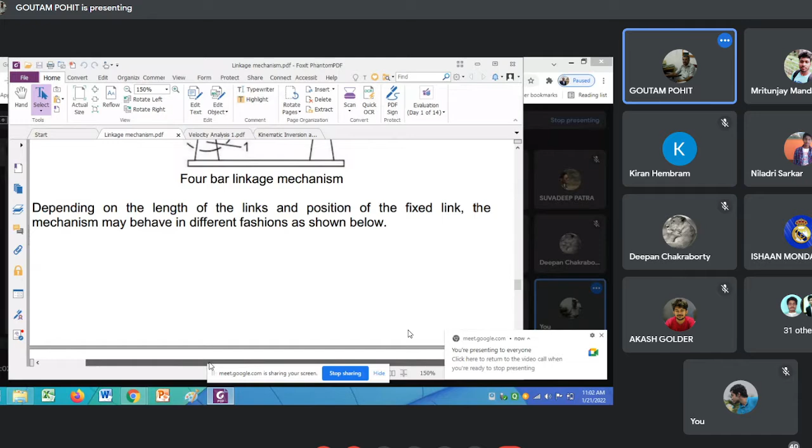Okay, let me start the class.

We left at this place in the last class, right? This is a four-bar linkage mechanism, and these are the four members: two, three, four, and one was the fixed member, which is fixed to the ground. They are connected with the help of pin joint or hinge joint.

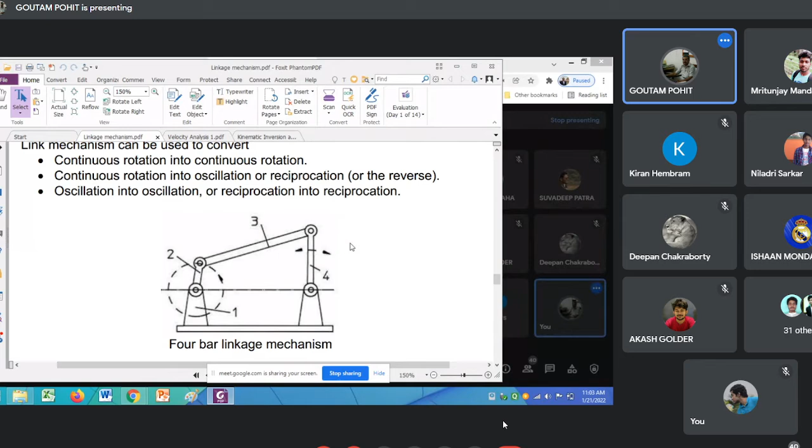For the time being, what we have done is we have fixed member one to the ground. If I start rotating link 2 as crank, then link 4 will also start rotating. Depending on the size of these links, whether it will completely rotate as a crank, or it will oscillate as a rocker, depends on the size of these four members, nothing else.

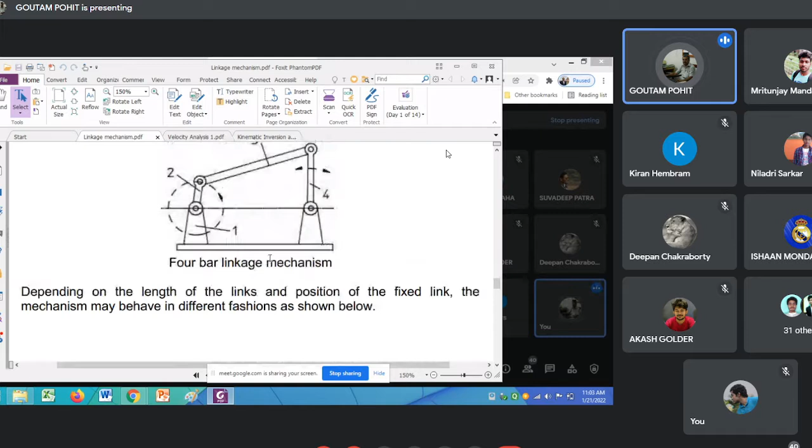We tried to find out geometrically if it is possible to find the extreme positions of the link, if we know the dimensions. We have explained these figures also: when it will be double crank, crank rocker, double rocker, and parallelogram linkage mechanism.

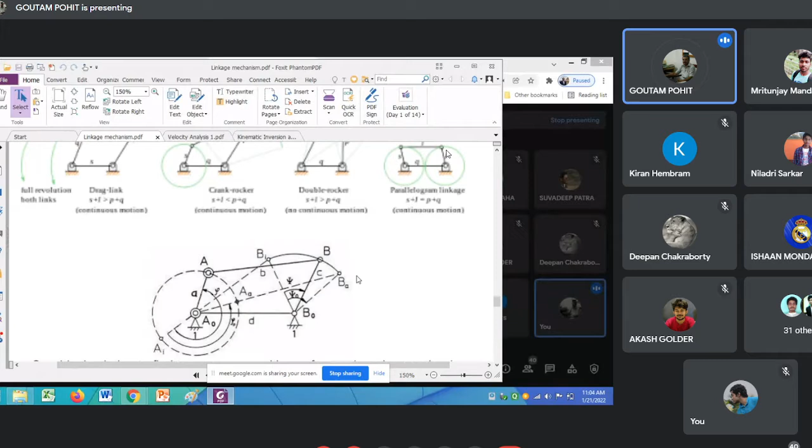Now, suppose this is a four-bar linkage mechanism, same mechanism, and there is a figure here which is a slight modification. What we have done is we have removed link three. Instead, we make a circular slot here, with the same radius as link 4, link 3, so that its center will be here. Within that slot, we place a sliding bar, this link 3, which can slide along this curve. The radius of the curve and the bar is framed such that it can easily move in this direction.

Sir, a few people are trying to join. Yeah, that's the problem.

Now, so what we have done is, since somebody has just joined: this is a four-bar linkage mechanism, we remove link 3. Instead, we make a curved circular slot, fixed to the ground, and the radius of the slot is such that it will have the same.

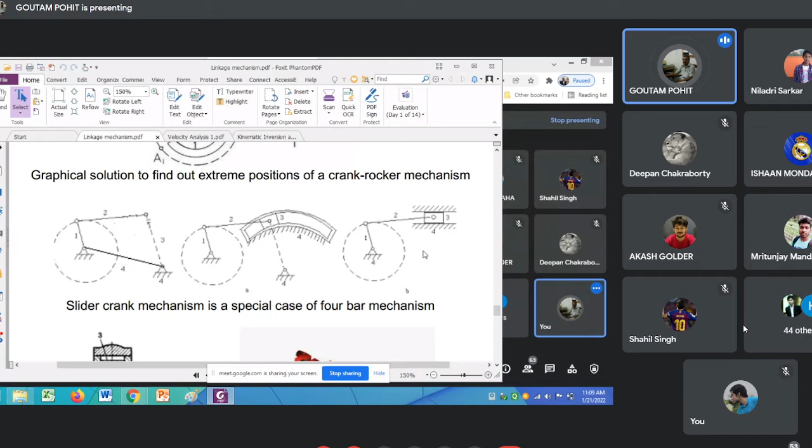The main advantage of this mechanism is that one link has a rotating motion and the other has a reciprocating motion, so we are converting rotating motion into reciprocating motion. The reverse is very useful if we see the engine of a car. This is an IC engine.

What? I couldn't get you.

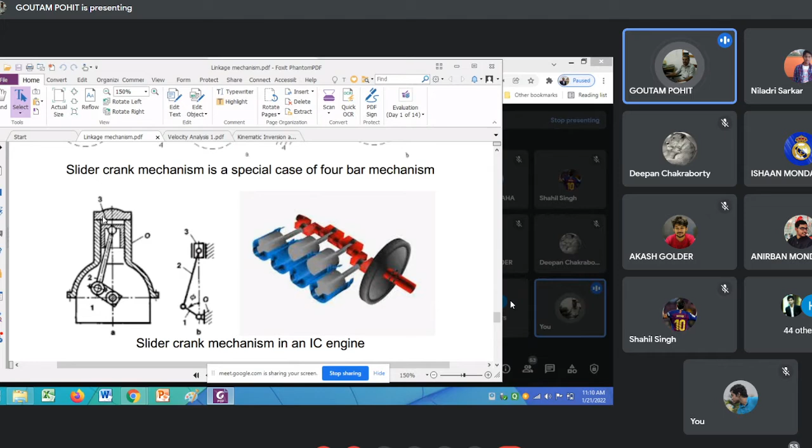Anyway, now this is the slider crank mechanism. This is the engine cylinder of a car. This is the space where the fuel, either diesel or petrol, enters through some valves. I can show you, this is an actual car engine. So there is some inlet valve, and there will be some exhaust valve.

This is the slider crank mechanism. This is the piston, this is the cylinder. Fuel will be burned in this region and this will produce enormous energy. By this energy, the piston will try to reciprocate in this direction, and as it reciprocates, this reciprocating motion is converted to a rotary motion with the help of a slider crank mechanism.

Now, for a car engine, this is called the crankshaft. We generally have at least three-cylinder or four-cylinder engines, and the positions of the crankshaft are made such that the firing takes place at different positions, so that it will be more or less uniform.

But still, there is a fluctuation of load. In order to remove that fluctuation, we use a flywheel. This is the flywheel. This is an essential part of any automobile engine. But our concern is this slider crank mechanism.

Now, as it moves in this direction, it will come to one extreme end, and as this point comes in this direction, it will reach another extreme end. So this internal length we call the stroke length of the slider.

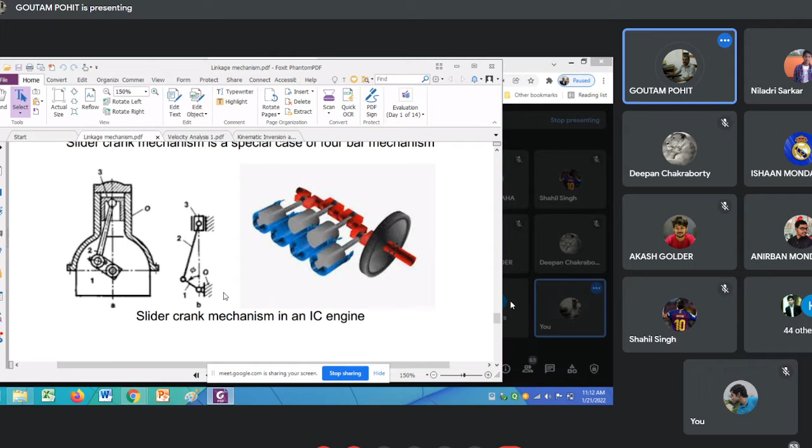And this is an actual engine. Generally, if it is a four-cylinder engine, we have four cylinders placed vertically, with inlet and exhaust valves. Inlet is for the injection of the fuel. Exhaust is for after the burning of the fuel, the entire gas comes out through this, ultimately to the exhaust. The intake positions, compression, expansion, and exhaust will be dealt with in your thermodynamics and engine classes in detail.

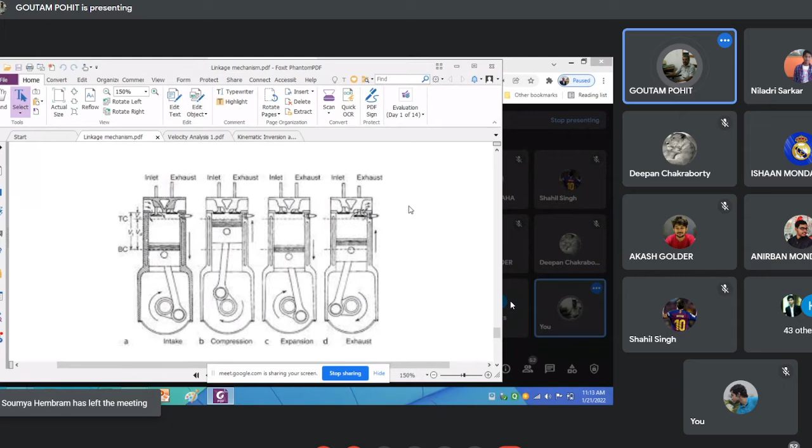Now there's another aspect, the transmission angle. For a kinematic chain, it is a kinematic quality which gives us an idea of how well the force is being transmitted. This is a driving crank, and this is a driven crank. Force will be transmitted perpendicular to this, because along the length we cannot transmit any force. So this angle, mu, is known as the transmission angle.

This mu, if it is 90 degrees, then it will transmit maximum power. But if it is at some other angle, there will be a problem with the transmission, because the force will be along the AB direction, and no force will be there to rotate the link. So this is the definition of the transmission angle.

Two extreme positions of the transmission angle are shown here, you can go through it and understand. These are shown in terms of the link lengths.

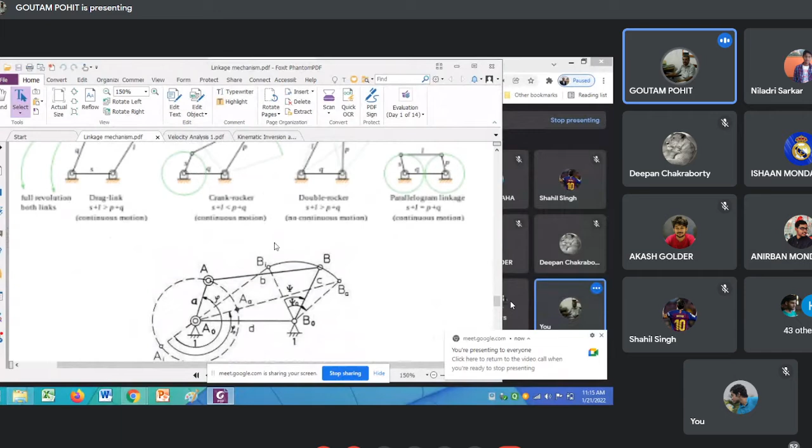Now, going back to where we were, we mentioned that we can geometrically find out whether a four-bar linkage mechanism is a double crank, crank rocker, or anything else. But sometimes it's difficult to do all the geometrical calculation.

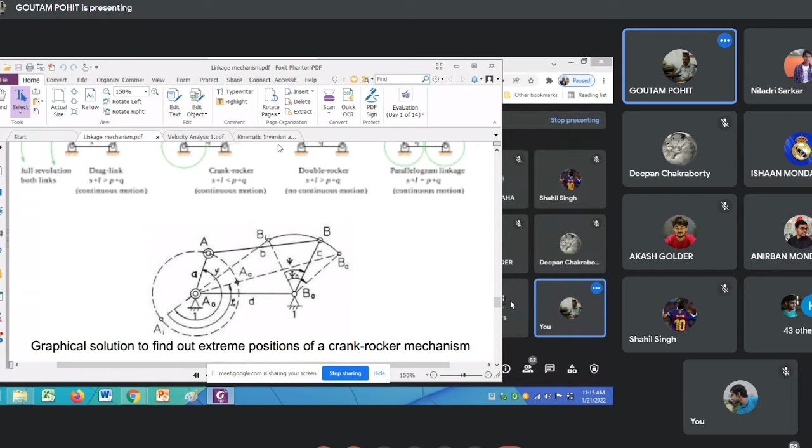There are some criteria by which we can say beforehand how a link, a chain, will behave. Another important thing is that in this particular four-bar linkage mechanism, we have fixed this member. If I fix other members, the behavior of this four-bar linkage mechanism might change completely. Though it is a very simple mechanism, it has so many varied qualities.

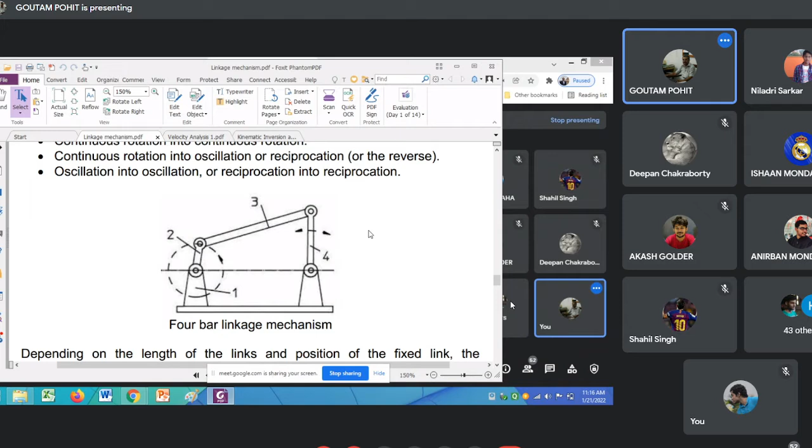So fixing different members one at a time and generating different mechanisms, we call this a kinematic inversion. So my next topic will be on kinematic inversion, kinematic inversions and Grashof's criteria.

It is observed that by fixing the links of a closed chain, a four-bar linkage mechanism, one at a time, we can get as many different mechanisms as the number of links in the chain. This process is known as kinematic inversion.

A particular four-bar mechanism would behave like a double crank, double rocker, or crank rocker depending on some relationship involving its link lengths and type of kinematic inversion. Grashof's criteria provide this information, given way back in, I think, the 19th century.

It states that the sum of the shortest and the longest link of a planar four-bar linkage... remember this is based on the planar four-bar linkage mechanism.

Seventeen minutes past, still people are coming.

It states that the sum of the shortest and the longest links of a planar four-bar linkage cannot be greater than the sum of the remaining two links if there is to be continuous relative rotation between two links.

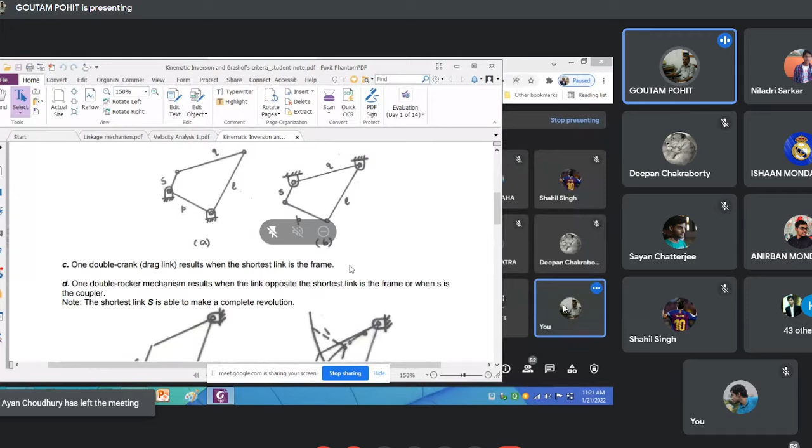If it is a double rocker, as per Grashof's criteria, it seems to violate the condition that if they are double rocker, then at one point this will stop. Another point when it comes to the extreme position, there will be a stoppage, a stationary point. So continuous motion is not possible then, but it will be.

Because what will happen, you can try it by the drawing, is that as it comes to the extreme positions, it will come back to the other end. What will happen is this small link will rotate completely, so it will have a continuous motion. This connecting rod or coupler will have a continuous motion, but still this will rock.

This will behave as a rocker, but this will completely rotate. So we have a continuous motion. So this is one condition.

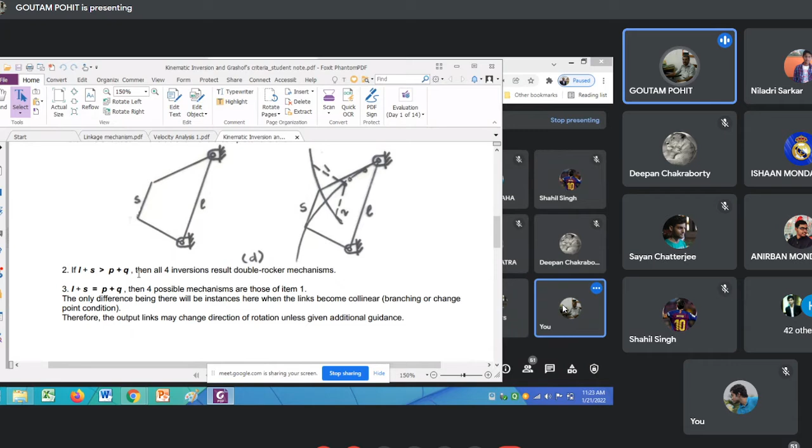L plus S is less than or equal to P plus Q. Second is when L plus S is greater than P plus Q. Then all four inversions result in a double rocker mechanism, because it's violating Grashof's criteria. As per the criteria, if it is less than or equal to, then only it will be continuous motion, so naturally it will be a double rocker.

And when L plus S is equal to P plus Q, then four possible mechanisms result, as in item 1. So again, four possible conditions could occur when L plus S equal to P plus Q. The only difference is there will be instances when links become collinear, meaning there could be a condition when they are in the same straight line. Then what will happen? It will behave as per Grashof's criteria depending on whether I'm allowing it to move as required.

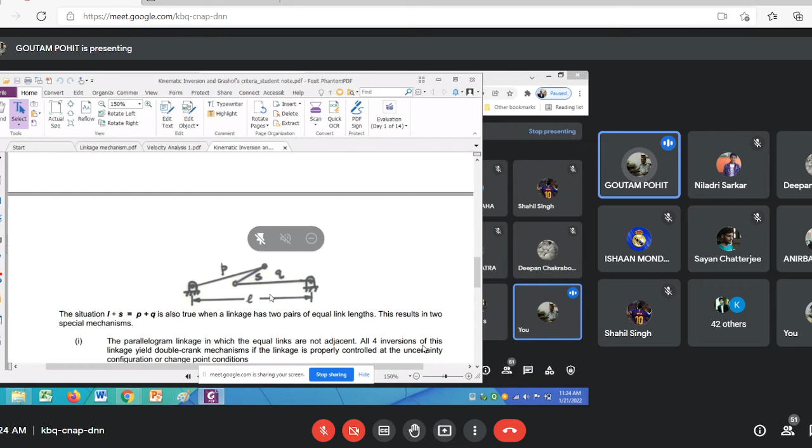For example, suppose it will be a double rocker in one case. Now I put a prop here so that after coming here, it cannot move in this direction. Then what will happen? This will rotate completely, but when it comes back, it will behave as a rocker. But that is if I give some constraint there. Otherwise it will behave as the condition of one.

Now, the parallelogram linkage is one in which the equal links are not adjacent. This results in a parallelogram linkage. All four inversions of this linkage yield a double crank mechanism, if the linkage is properly controlled at the uncertainty configuration or change point condition, meaning in these collinear conditions.

And a deltoid linkage is one in which the equal links are adjacent. Now here you see that they are not adjacent, but if I put 2S and 2L like this, it will result in a deltoid linkage mechanism.

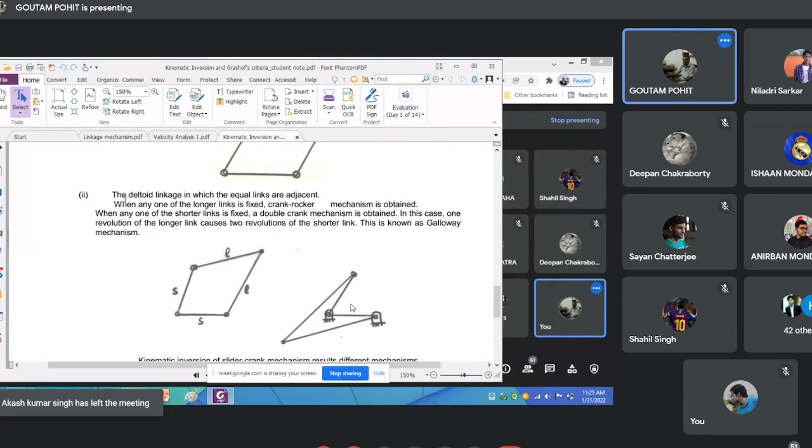Now when one of the longer links is fixed, if I fix down one of the longer links, it will result in a crank rocker mechanism being obtained. When any one of the shorter links is fixed, a double crank mechanism is obtained. If I fix this one, it will result in a double crank mechanism.

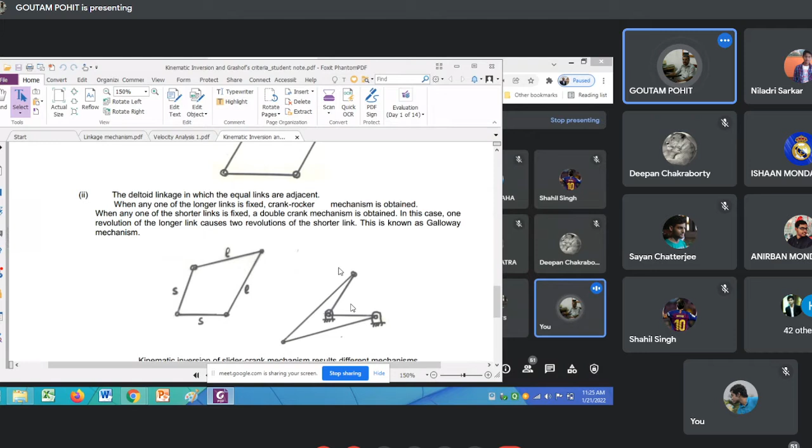In this case, one revolution of the longer link causes two revolutions of the shorter link. This is known as the Galloway mechanism.

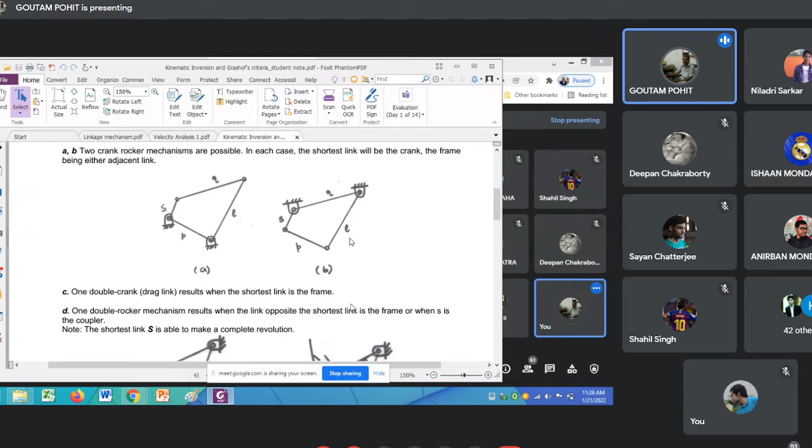So this is all about Grashof's criteria basically. Suppose the four link lengths are given to you, and it is mentioned that one of them is fixed. Then, considering Grashof's criteria, you can easily tell whether it will behave like a double crank, crank rocker, or double rocker. You only have to remember these conditions.

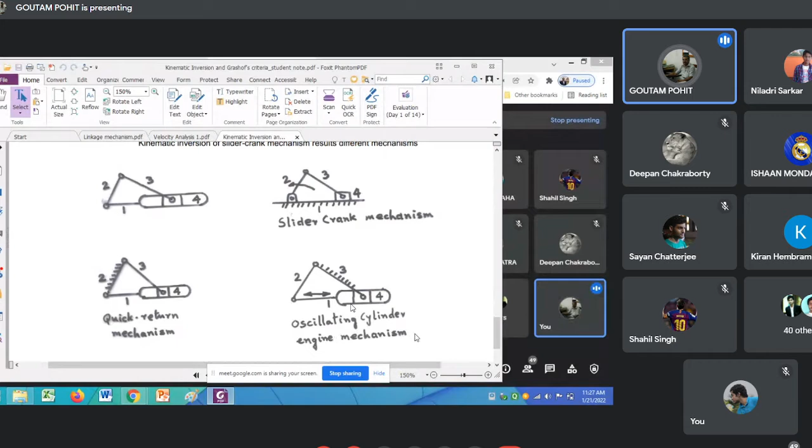We'll get a quick return mechanism. That has been used in a shaper machine. We'll talk about the quick return mechanism later on. And if I fix number three, we'll get an oscillating cylinder engine mechanism. This is generally used in radial engines.

So you find that we can get three different kinematic inversions by fixing three different links of a slider crank mechanism. Any question?

So we have covered up till kinematic inversion. Next, I will start the analysis part a little bit.

What, if I consider... say it again.

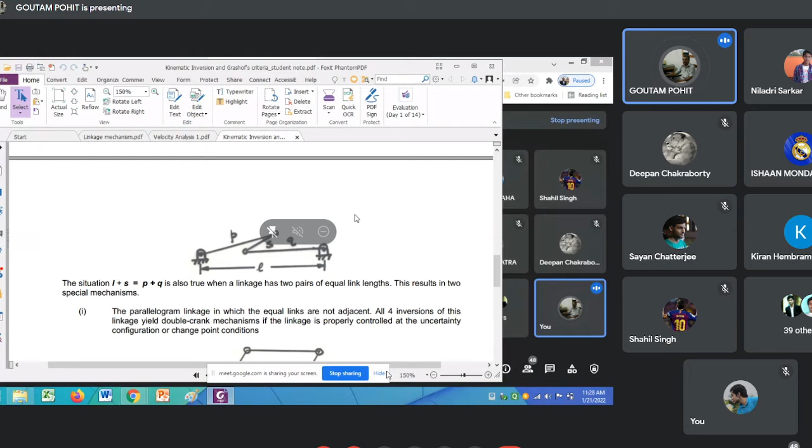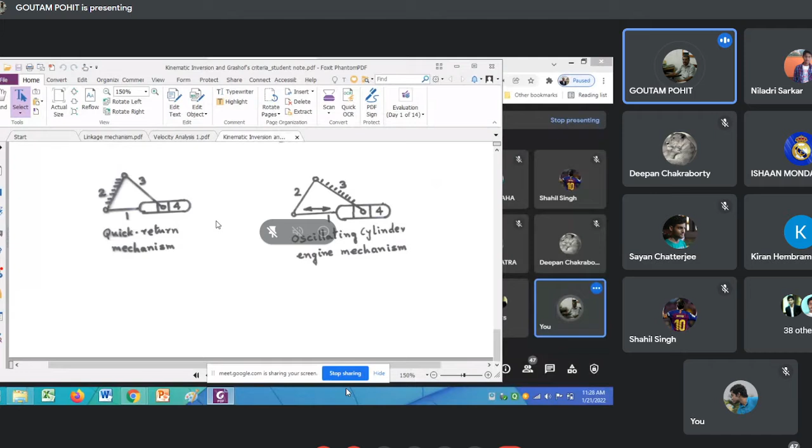For example, a quick return mechanism. See here, this slider is moving as this is happening. So it will give a complication, and it's a very effective mechanism we can result.

But let us first try with the four-bar linkage mechanism, its velocity and acceleration analysis. Then we'll come slowly to the complicated mechanism.

Redundancy means... no, for a four-bar linkage mechanism, we cannot have any structure as such. There will always be a motion. But if it is a three-bar mechanism, then it will be a structure.

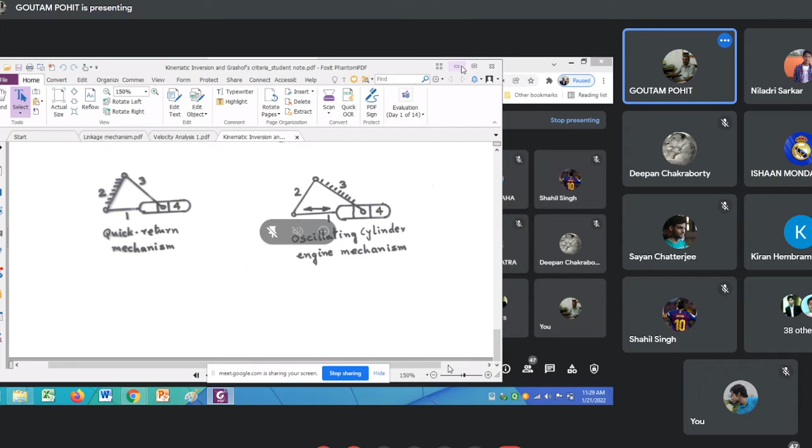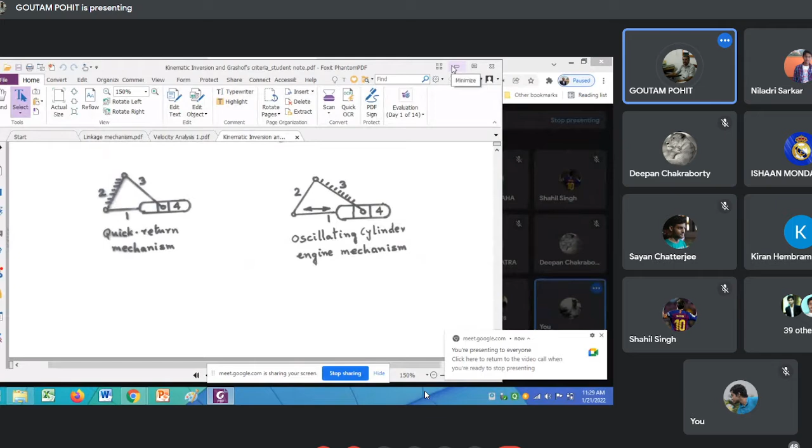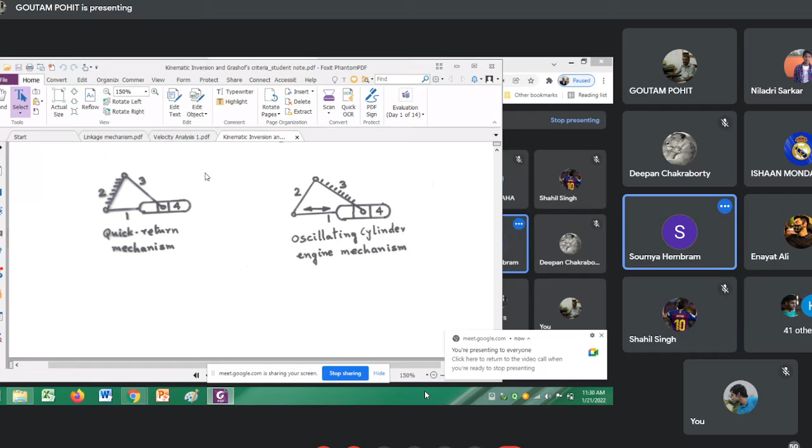Who's coming? Who has joined last? Just now, who has joined? So I have. What happened to you? What is the time now? 11:30. Actually I'm not so well, sir, so I was unable to join at 11. Sir, I also joined right now. I joined at 11 o'clock, left at 11:28, and just joined now. Okay.

So we'll start with the velocity analysis.

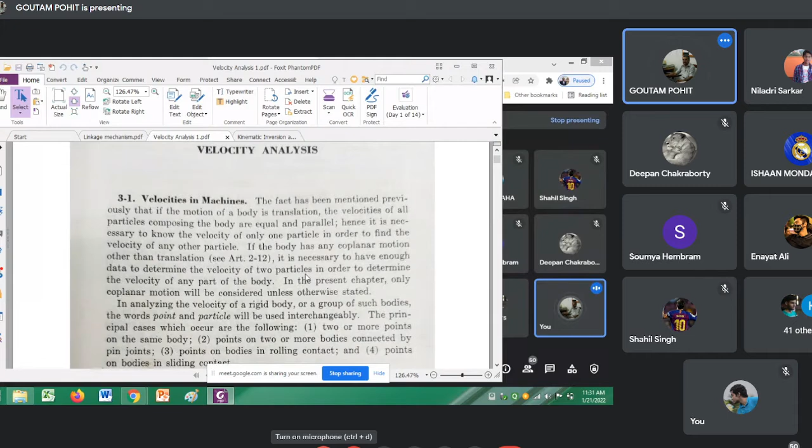There are some problems and other things. These pages, whatever I'll be sending you, this is chapter 3 of Doughtie and James. Some of the pages I have just copied, and I'll be sending this handout to you. I'll be highlighting the major points, whatever is written here.

Now, since we are going to do the velocity and acceleration analysis, and the treatment will be done graphically only for the time being, we'll go for the analytical case also. A vector representing velocity will have a magnitude, direction, and sense.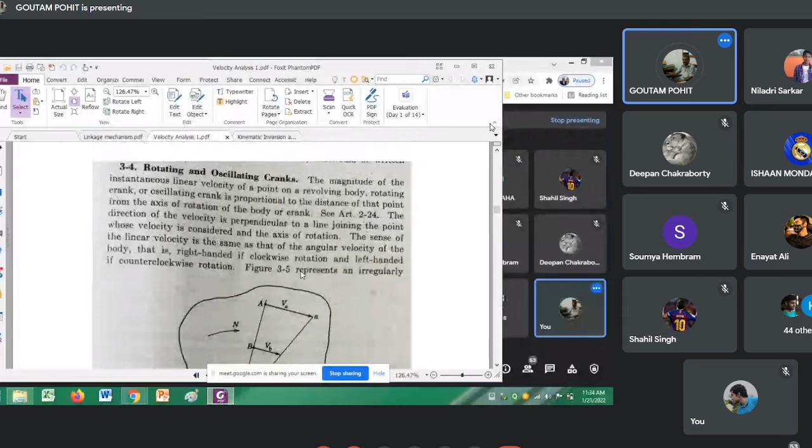Since we know the angular velocity of object M, and A is a point lying on this object, what will be the velocity of point A? VA will be equal to omega into QA. And what will be its direction? The direction will be perpendicular to the line QA. This is the velocity in magnitude and direction of point A, right? No confusion?

No sir, okay. This is the vector by which I am representing the velocity. What will be the velocity of point B? Omega into QB, sir. Okay, and if I draw with the scale, VB will be the velocity.

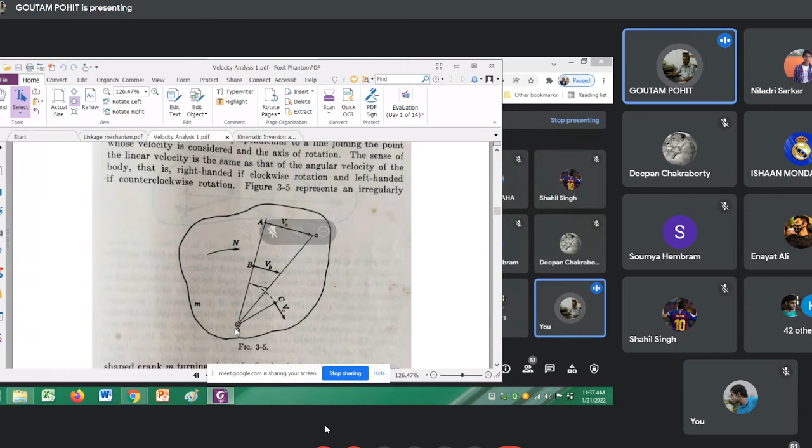It's okay, right? Because this is a similar triangle. The velocity of point A and velocity of point B will be proportional to their distance from point Q. So naturally, QB by QA will be equal to VB by VA. So we are using this similar triangle proposition to find out the velocity of point B.

This is the way we will proceed during our graphical calculations. What will be the velocity of point C? It will again be QC into omega. That will give VC.

Instead of doing that calculation, we take an arc QC, bring it here, and draw a parallel line here. So this length will give the velocity of point C in magnitude. Its direction will be perpendicular to this line.

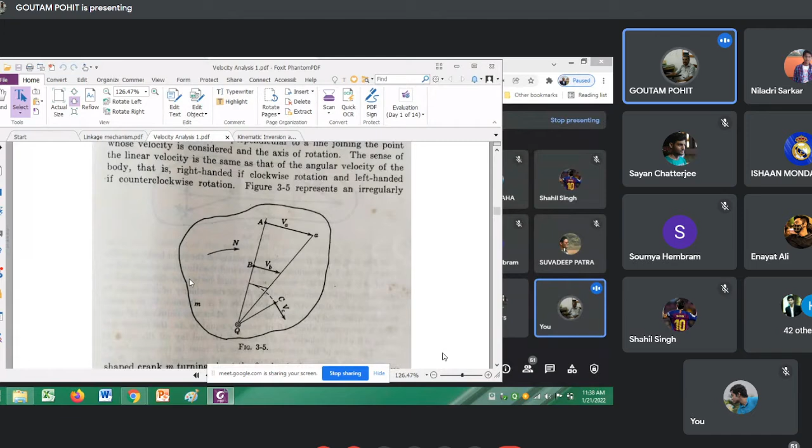That means if I know the velocity at any point of a particular object, and if we know that object is rotating about some point, then we can find out the velocity at any other points, both direction and magnitude.

I repeat this one. Velocity of point C we want to find out. What we do is take an arc QC, draw this line. From here, draw a line parallel to this to cut this line at this point. So this is the magnitude of the velocity of C, because this is proportional to their distances from the center Q. But actual velocity direction and sense will be here.

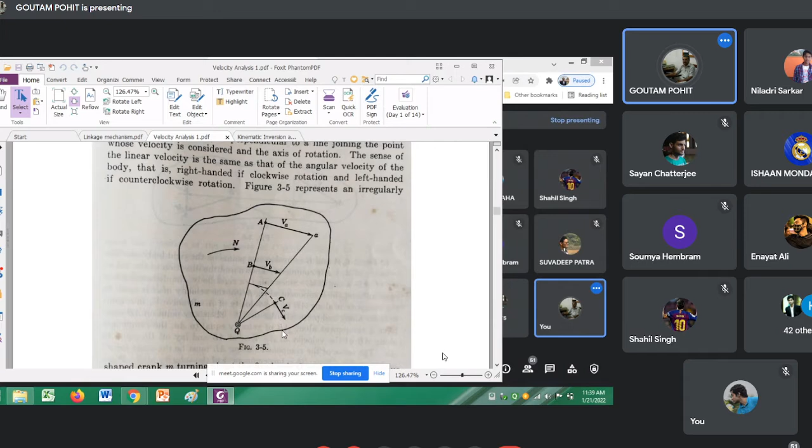You have to bring it here.

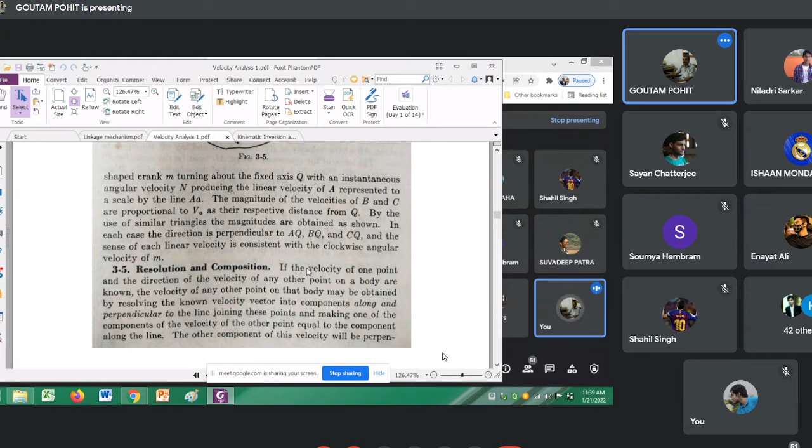Now, velocity and acceleration analysis can be done in four methods: resolution composition method, instantaneous center method, centro method, and relative velocity method. Relative velocity method is very good for calculating the velocities and accelerations at any other point, if I know the velocity of a point on a linkage mechanism. But we'll start with the resolution and composition method.

Suppose let us come back to this four-bar linkage mechanism. This is a four-bar linkage mechanism, right? Now you will find that this link, this is a crank, this is rotating. And if it rotates, this will also rotate.

Now, any point on this crank will have a velocity which will be rotary motion basically, any point. And since it is rotating, we can find out at any point the directions and magnitude of the linear speed, like if we know n into corresponding distances. This is also true for this one, because this is also rotating with a constant angular speed. Now, what will happen to this member?

What will happen is that this member will rotate and at the same time there will be a translatory motion. That means velocity at any point on this member, the linear velocity, will be perpendicular to this line. Similar will happen for this one, but this won't be true for this one, because this connecting rod is at the same time rotating and translating. So at different points it could have different velocity directions.

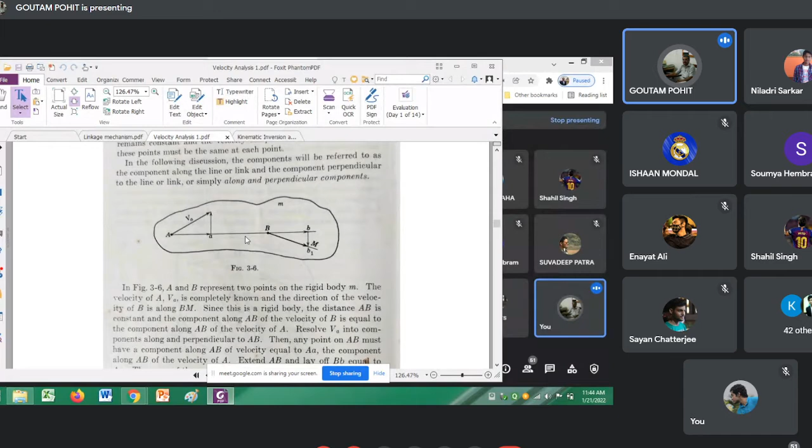Yes, sir. Because if it is not, then after some time the distance between A and B will change. As per the condition of the rigid body, that cannot happen. So the velocity component of B along AB will be equal to BB.

That we know. And another condition has been given: the direction of the velocity is known. This is the direction of the absolute velocity. So we can find out, we raise the perpendicular from this one to cut it here, and this will give the velocity of the point B.

So that means you find the velocity here is along this direction, its magnitude is A, and velocity of the point B is along this direction, its magnitude is BB1. And it's most likely that VA and VB are not equal in magnitude or direction, so it's completely different. That means this member is actually rotating at the same time it is sliding.

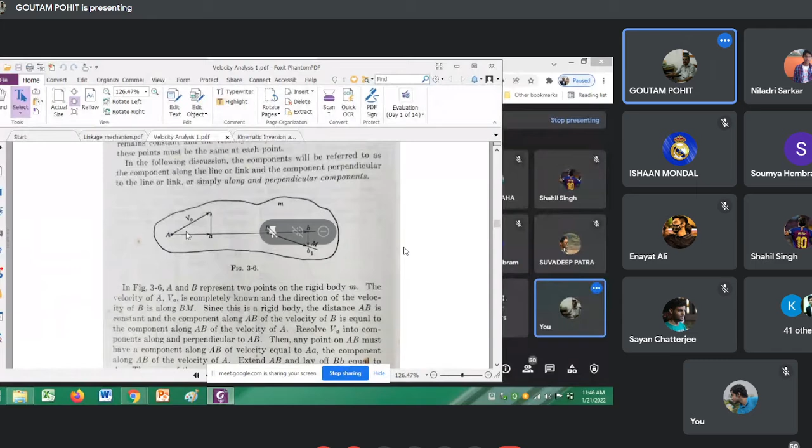If it would have only had sliding velocity, then all the points along any line would have the same direction and magnitude. It will be parallel if only sliding motion was possible, but it is not. Now let us take another point, C.

Where A, B, C, three points we have considered on the body M. Now for point C, neither velocity nor direction is known. But we know the direction of the velocity of B, and we know completely the velocity of VA - point A's velocity we know completely. So how to proceed? Again, we join A and B.

And extend this one, drop a perpendicular. So this is the component of VA along AB. Naturally, following the rigid body condition, this will be the component of the velocity of B along this direction, which will be equal to this distance. And if I know the absolute velocity direction is this direction, then we can find out this velocity - it is a perpendicular to find out this velocity.

So we know the velocity at point B and velocity at point A. We have to find out the velocity of point C. So again, we join AC and BC. Find out the velocity VA along this direction - this will be AA, and cut CC equal to AA. Similarly, velocity of B along BC will be equal to BB, cut CC1 equal to BB.

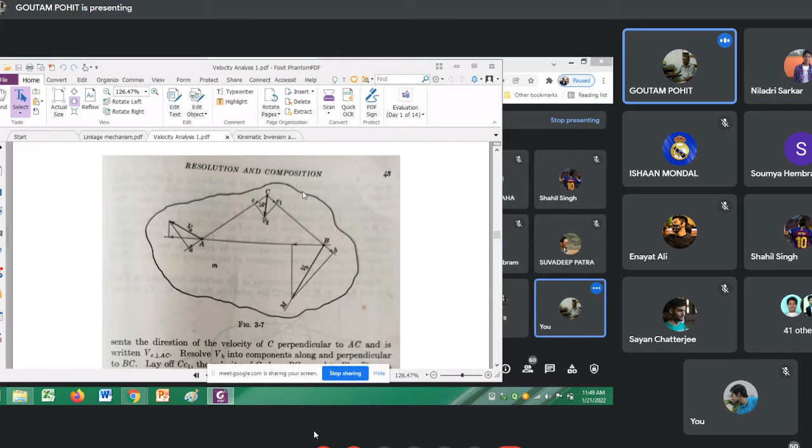Yes sir, there is another example being given where you go through it. The point A and B velocity directions are given, velocity magnitude is given, but AB is on the same straight line, and you have to find out the velocity of the point C.

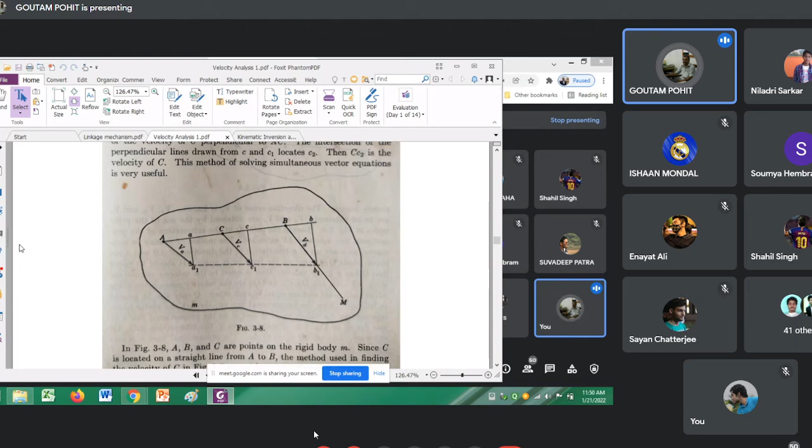Now what they have done is basically they assume that this link is rotating about some point. So this is the perpendicular component. Now if I meet these two perpendicular components along these directions, and join this and extend this to meet this one, as if this link is rotating about that point, then only that condition will happen, that this will give the velocity of point A and point B perpendicular component. So accordingly, if I know this, we can find out the component C. Once we know the component C, we can easily find out the velocity of the point C. It has been explained here in detail.

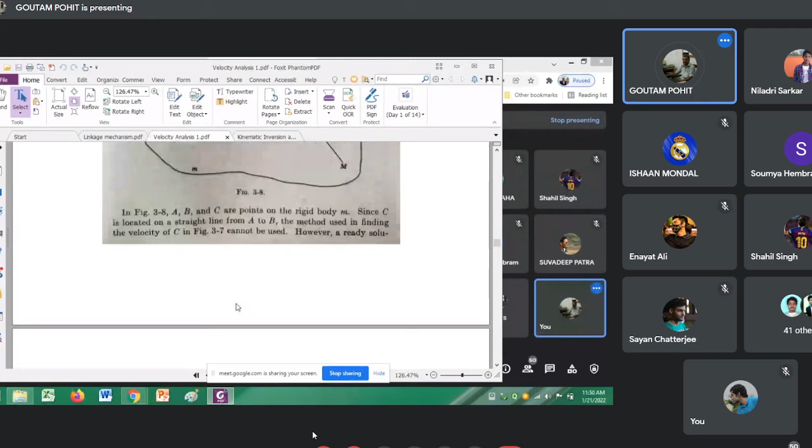Go through it. Now, the same relationship using resolution and composition method has been used to calculate the velocity of point B when we know the velocity of point A.

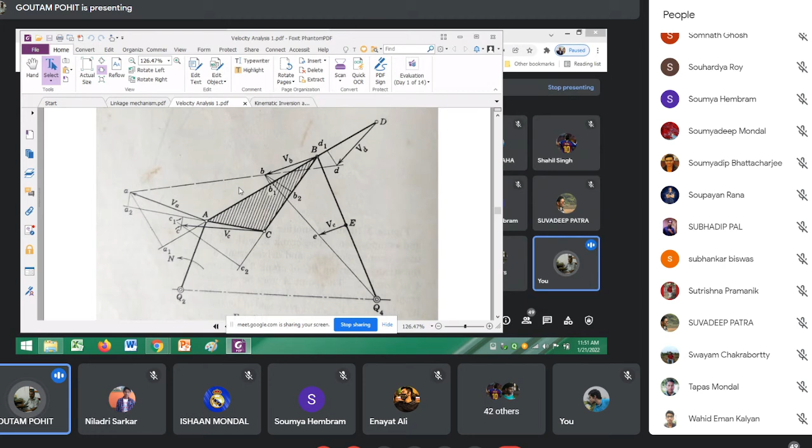Similarly, they have tried to find out the velocity of the point C also. Since VA is completely known, we can find out the velocity of B. Take a perpendicular direction, and this length will be equal to this one. What will be the velocity direction of B? Since this will also rotate about a fixed center, naturally the velocity of point B will be perpendicular to this one. So that direction is known. Once we know the direction, we raise a perpendicular to find out the velocity of the point B. Got it?

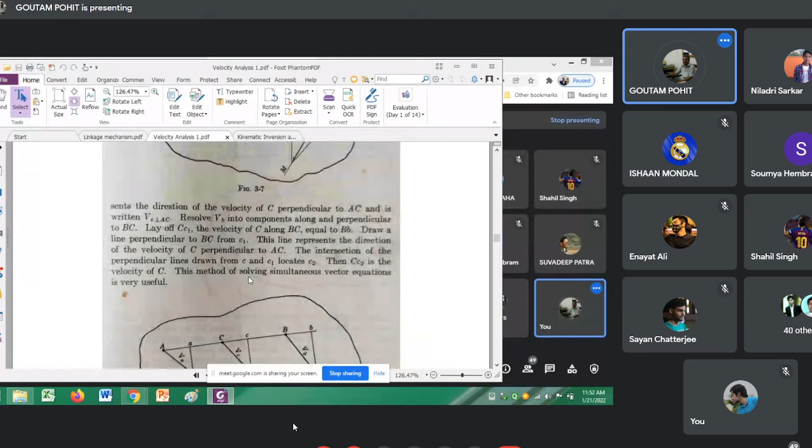Yes sir. Now, if we know the velocity of point B and velocity of point A, we can easily find out the velocity of point C, just like here. That is being explained here.

So go through it. Suppose I want to find out the velocity of the point E. How to find out? You join the tip of the velocity to here and draw a line parallel to this one. That will give the velocity of point E. Similarly, if I want to find out velocity at any extended point, we can find out easily. Same procedure you have to follow.

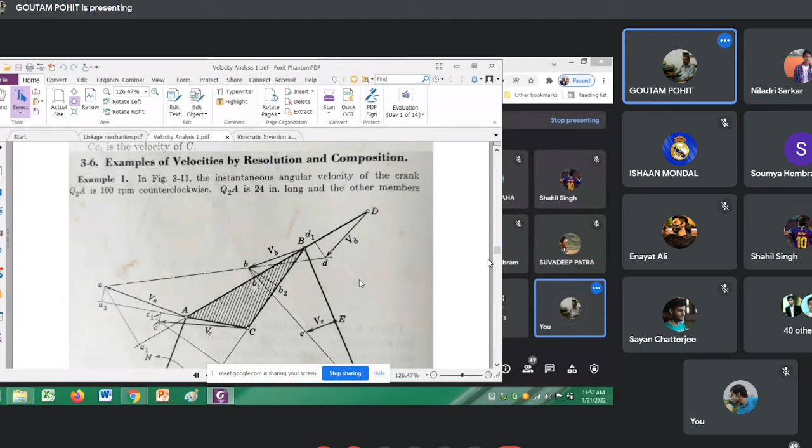Now, let us do some little bit complicated problem.

Sir, if there are 2 points on a rigid body, A and B, and we join them by a same straight line, and both have the velocities in the same direction, then all the points lying on that straight line from A to B will have the velocities in the similar direction as A and B. Well, if it is along AB, then it will have the same thing.

What you say, that 2 points on a rigid body, direction of A and B, it will be same because it is only... It will be same, and at the same time if it is equal, then it is translated. No sir, they are not equal. Suppose the velocity at A and velocity at B both have similar directions, then all the points lying intermediate between A and B will also have the same direction. That's my question sir, because in the figure, when you showed that, will it be same direction?

Yeah, for example, this is the case. Suppose this point and this point have same direction, that means it is completely rotating about the point Q4. So all the points will have the velocity along these directions.

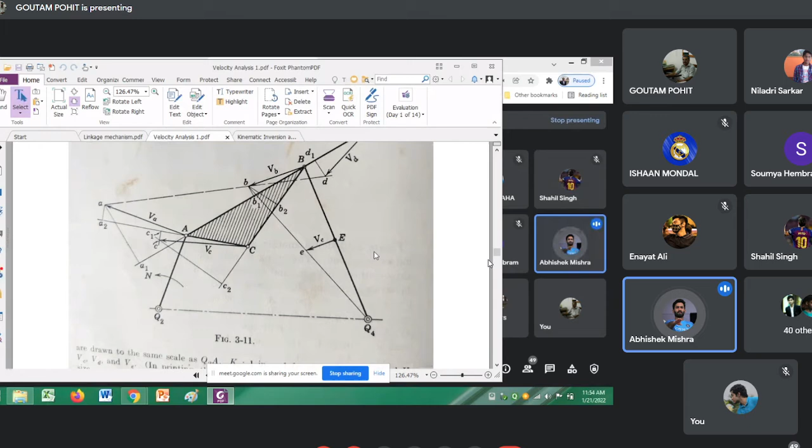No sir, that wasn't my question. Sir, in the case of a rigid body, can you scroll up a little? Yes sir, this question. A and B, we know the velocities direction at A and B. Suppose if both are in the same direction, then all the points lying intermediate between A and B, will they also have the same direction? Yeah, they will have the same direction.

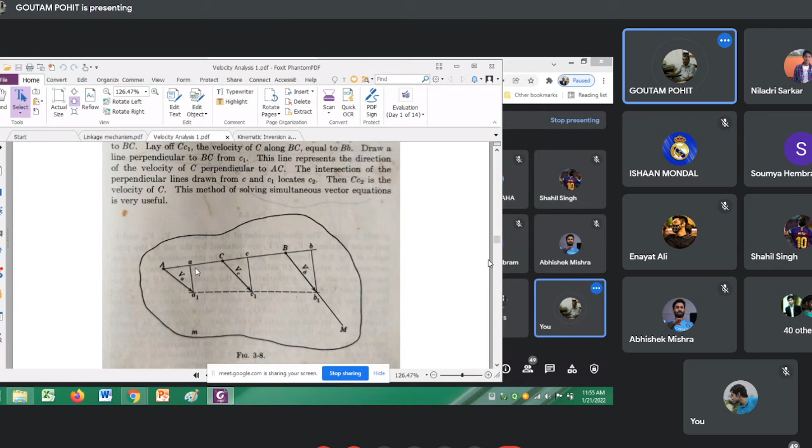Because this entire rigid body is rotating about some point, which may be outside this member. Okay sir. That's why, in this particular case, they are not parallel. In this example, they are not parallel, actually. Okay sir.

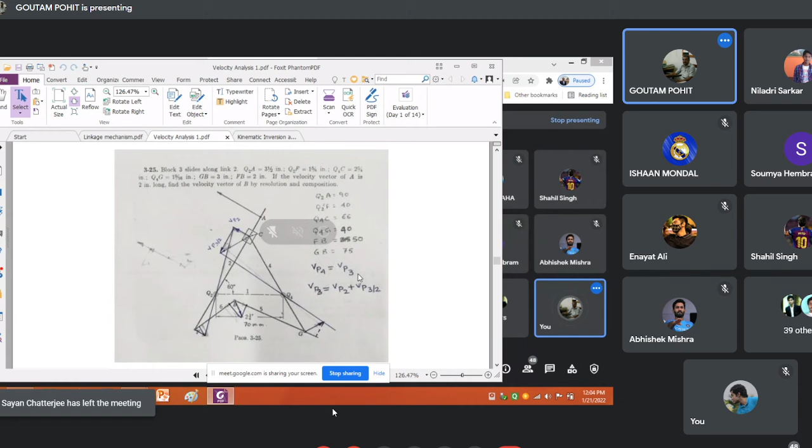This is the absolute velocity of the point on link 3. And this is VP2, point P2. So this is the equation basically: VP3 is equal to VP2 plus VP32.

Once we know, since if I am drawing this one, these directions we know, I will draw a line parallel to this one. So we know this one now. Once we know this one, we can find out directly this one.

Once we know the velocity of this one and the velocity of this point, we can find out easily the velocity of point B. Okay, got it? You should have some confusion.

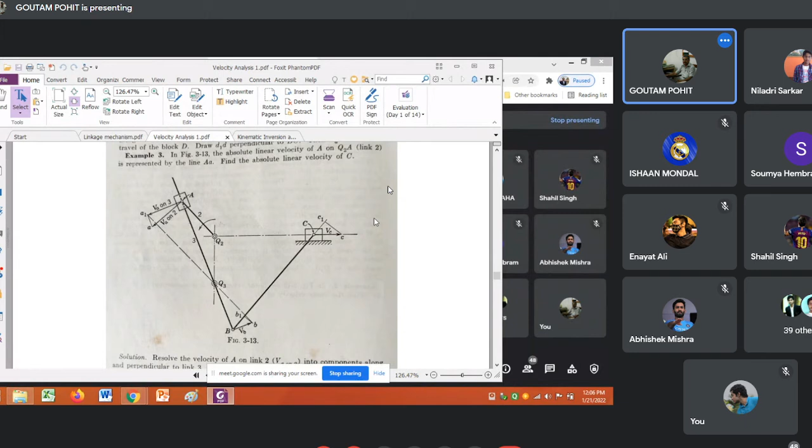What is this problem? Okay, there is some other problem solved here. Oh, same problem, same type of problem. You can solve it.

Now, there is another concept. We have so far covered the resolution composition method. Now, there is another concept called instantaneous axis of velocity.

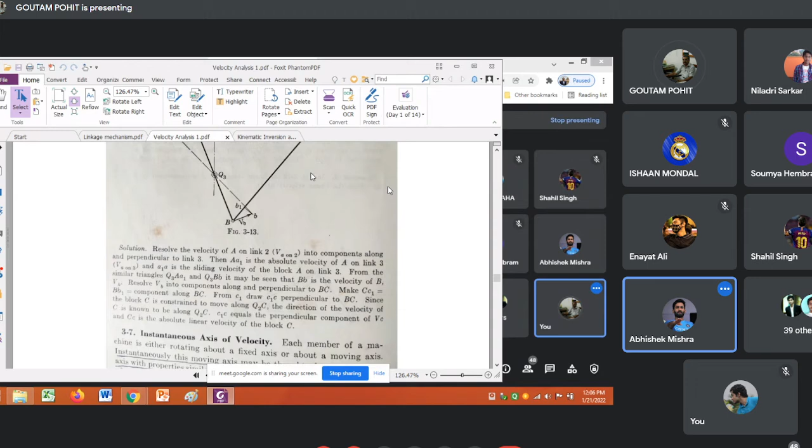Sir, was the direction of velocity at C provided in that case? One minute. The absolute velocity at C, was the direction provided in this case? Yeah, provided, because this is rotating about this point Q4.

So direction is provided because C is attached to this link, and this link is rotating about this one always. So naturally point C will have a direction perpendicular to this one. It cannot have any other direction.

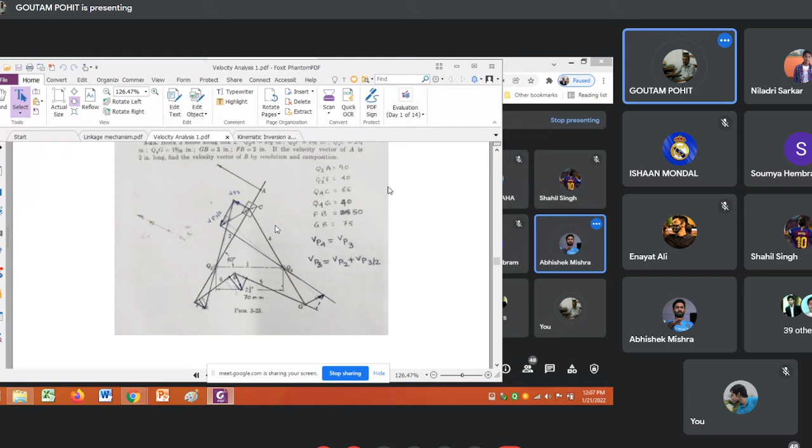From there we calculated VP32, this parallel line, this velocity. This is VP3 actually. This is okay.

Now, each member of a machine is either rotating about a fixed axis or about a moving axis. This concept gives actually the instantaneous axis of velocity. Instantaneously, this moving axis may be thought of as a stationary axis with properties similar to a fixed axis.

Suppose the velocity of a point A is given, both direction and magnitude. Velocity of point B is also given, direction and magnitude. Now, if these two are given, then can you find out the point about which this entire body is rotating?

We can draw perpendicular lines from VA and VB. We draw a perpendicular from here, we draw a perpendicular from here, they meet at point Q. This is called as if the body is rotating about this point Q. Now it could be either a fixed axis or it could be an instantaneous axis.

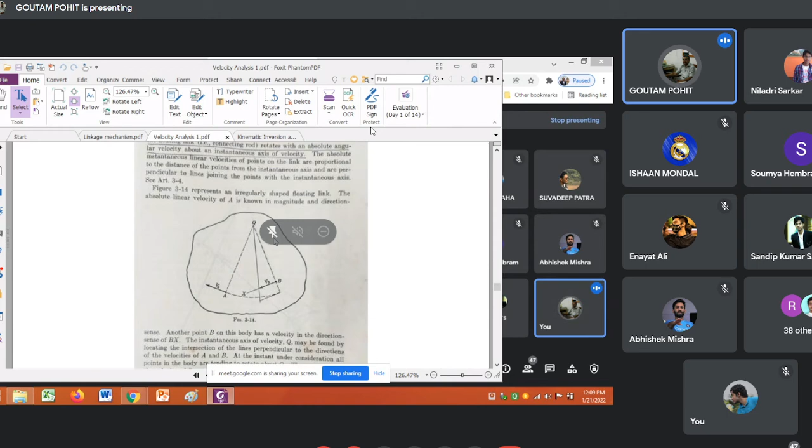For example, see the velocity of the point. These two are the fixed axis. Consider this member AB. The velocity of the point, if this is given, we know that, and velocity of B is also known. Now if I extend that thing, this perpendicular line, this line extension, if I extend this one and this one, they will meet at some point. So we can tell that at this instant the link AB is rotating about that point, right?

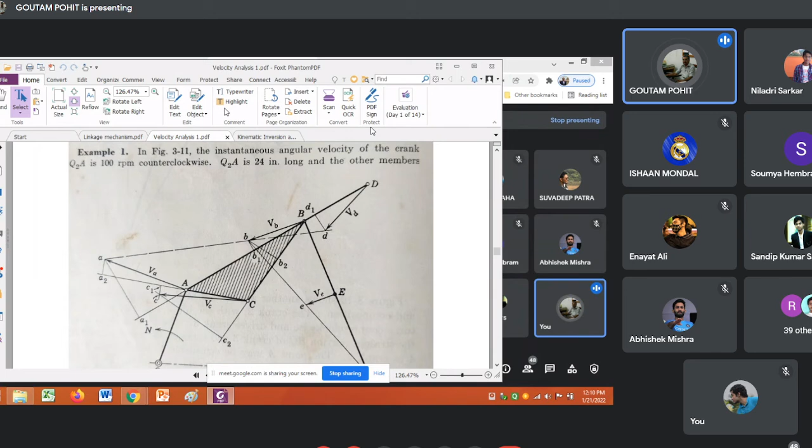Because it's following that same concept, that fixed center concept. The velocity of point A, because these two points A and B lie on the link AB. So what I do is I extend this one, I extend this one. They meet at some point, which could be outside the paper. Some point here, say. So we can say that this link AB is rotating about this point at this instant.

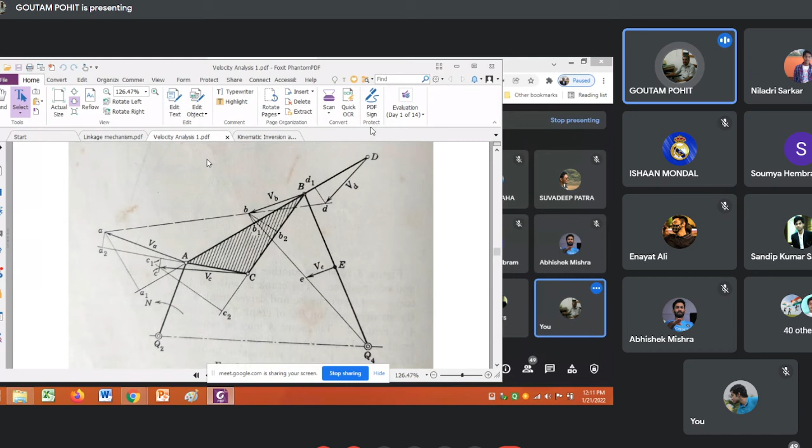Why is it called instantaneous center? Because in the next instant, actually, this angle will change. So this velocity direction will change, this velocity direction will change. So next instant we will get another instantaneous center, but which is different from the previous one. So with the present configuration, we can get an instantaneous center of that link, which is basically called the instantaneous center.

So suppose this is a four-bar linkage, what I was talking about. This velocity is known, this velocity is known. So we can tell that Q3 is the instantaneous center for this link 3, as if the link is rotating at this instant about the point Q3.

Now, if we know the instantaneous center of a link, then we can find out the angular rotation of the link 3 about the point Q3. How to find out? You extend this one, drop a perpendicular from here, measure this length, and you divide the velocity at this point by this length, you get the angular velocity of the link 3 about this instantaneous center at this instant.

And if it is a perpendicular, then only it will have component along these directions only, other direction it will be zero. See how they have found out? This velocity is known, this is known. So naturally, this distance will be equal to this distance as per the rigid body concept, and they cut BB1 equal to CC1 equal to AA1.

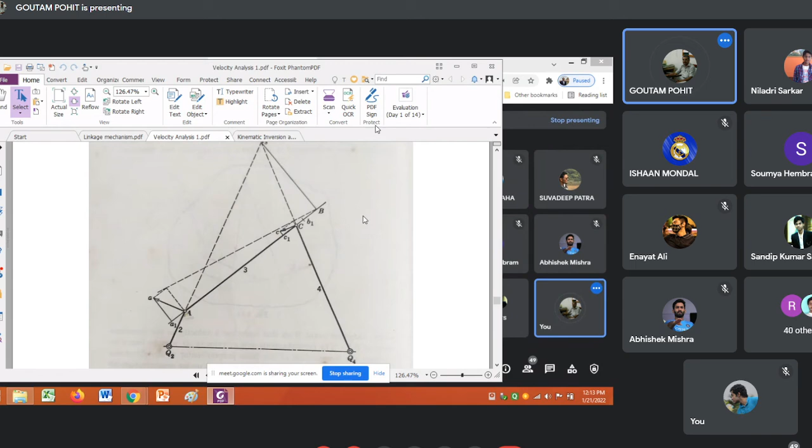And at this point, the velocity of the point B will have only this component because this point is perpendicular to this one. And naturally, we can find out the angular velocity of the link 3 by B1B divided by Q3B. Also, it will be equal to VA by Q3A. I can measure Q3A, VA we know, so VA by Q3A also gives the velocity.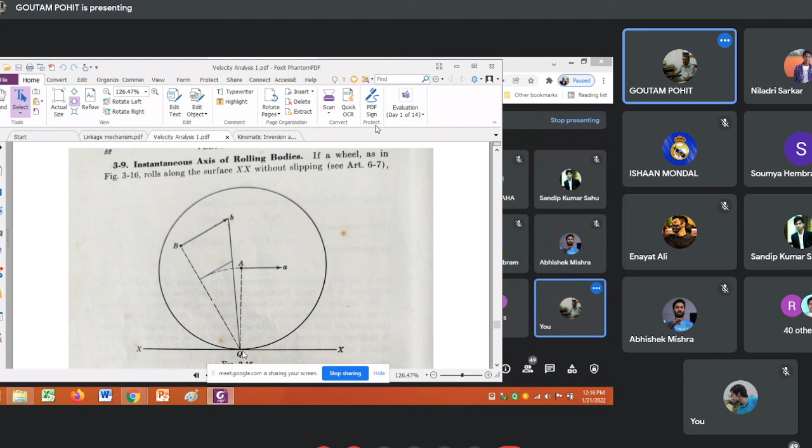You will find that if it's a cycle tire, if it's rolling completely, at any point you can find out the velocity direction, which will be joining from here to here. It will be this direction. If you consider a point here, you join this one, the velocity direction will be like this.

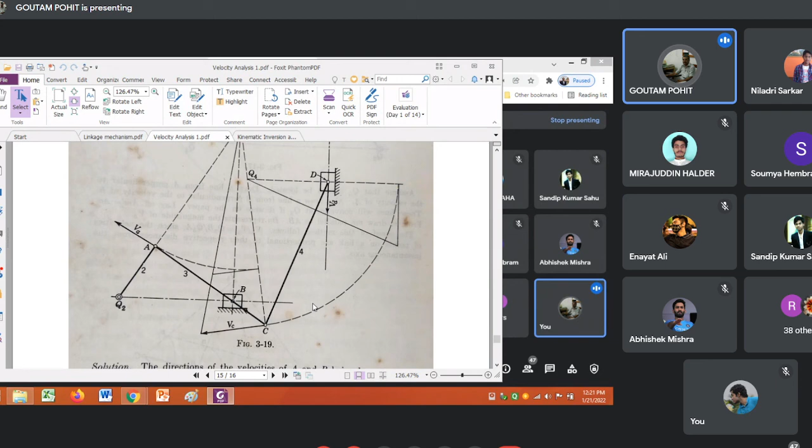There are two things to remember for the instantaneous center. One is that at any instant, a particular member will have only one instantaneous center, it cannot have two instantaneous centers. And the instantaneous center for this link is changing every instant. Whatever instantaneous center is there, it is for that configuration only at that instant, and it will keep changing. So these two concepts you should remember.

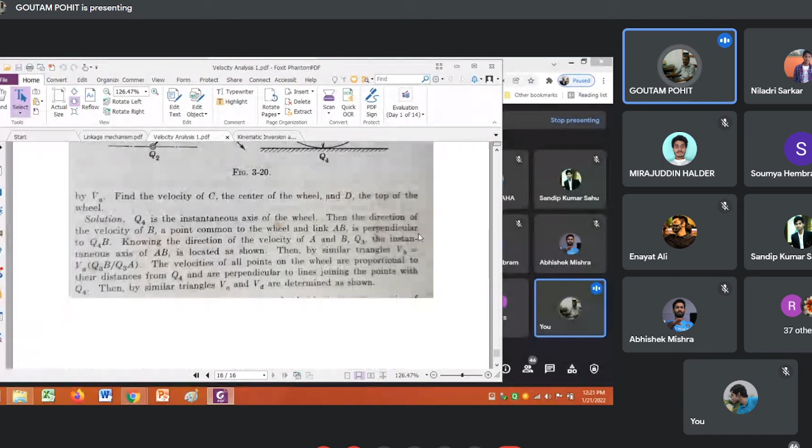So we have covered the resolution composition method, instantaneous center method. Centrodes we won't cover. In the next class, I think I will tell about the relative velocity method. If I cover that thing today also, it will be too much, I guess.

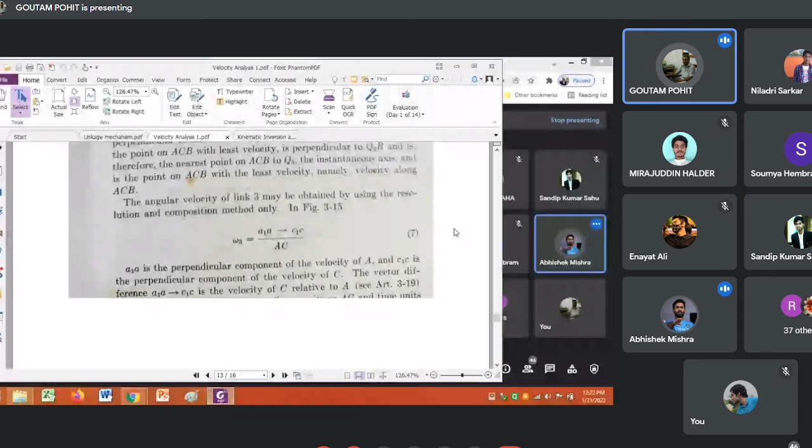Sir, will the questions in the exam be process specific, like do using this method or solve using this method? No, no, no, no, no. You can choose any method. Relative velocity method, I don't want to cover today. In the next class.